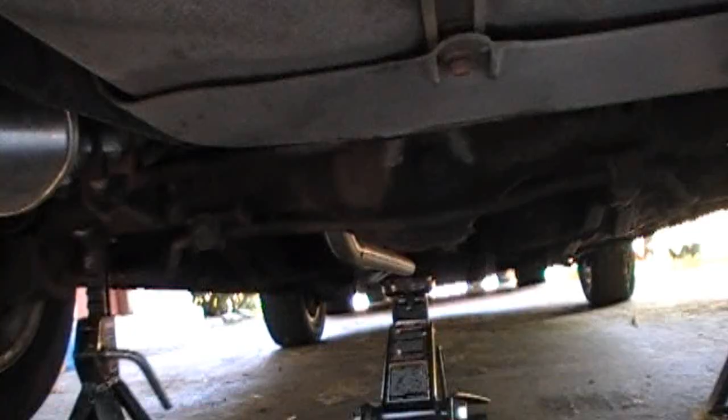As you can see, the car is already up on jack stands in the back, because it's time for a new maintenance group. I've done the engine, I've done the transmission. All that's left is the rear differential, drain and refill, and how to properly take care of one.

This is what makes the Corolla so much fun to drive, because it's one of the last few that is front engine, rear wheel drive.

So let's begin. As you can see, I got the jack stands on where they should be. I jacked the car up in the center of the differential. So next is to loosen the fill plug, take the fill plug out, and then do the drain plug, which is right there. So let's begin.

Since the same oil that goes in the transmission can go in the rear diff, the oil that's going to come out of here is going to stink really bad. Thankfully there's not a lot in there, so it won't take long. I'm replacing it with our friend...

Max Gear. I did not use Max Gear Oil in the transmission because I had a bad synchro, and putting the Synchromesh in there was a really good idea. Synchro Max fixed the third gear synchro problem, and now I can shift in all gears a lot better—well, downshift. It was hard to downshift in third gear. Anyway, this is all you need.

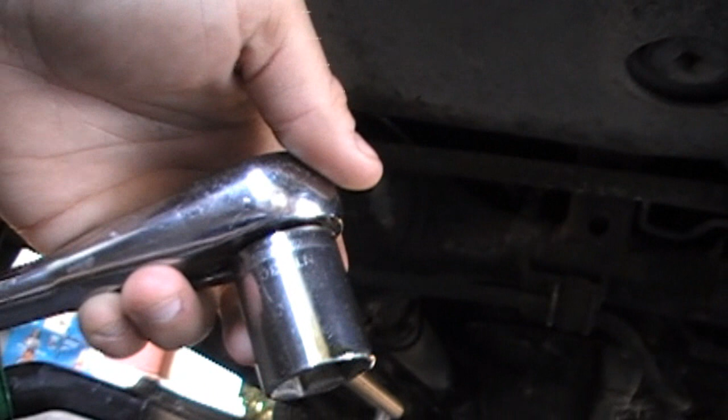So let's start this. Removing the fill plug. Ugh, it's black.

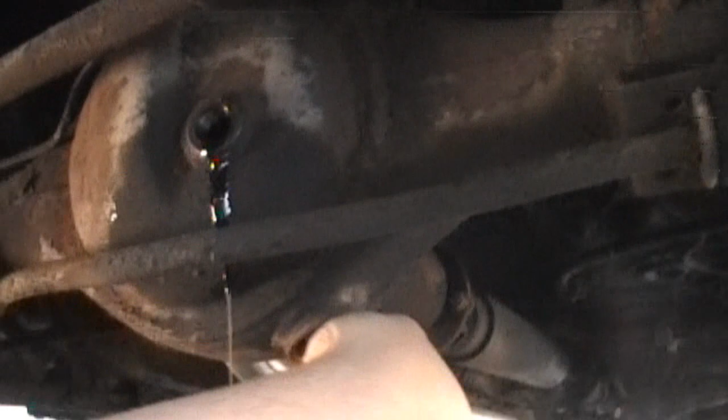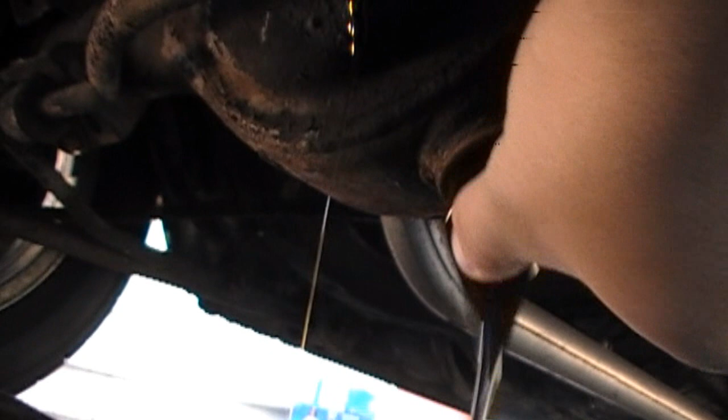Now it's time to remove the drain plug. Now, I don't know if you can see it. There it goes. Ugh, stinks! Let that drain. Okay, I put the drain plug back in.

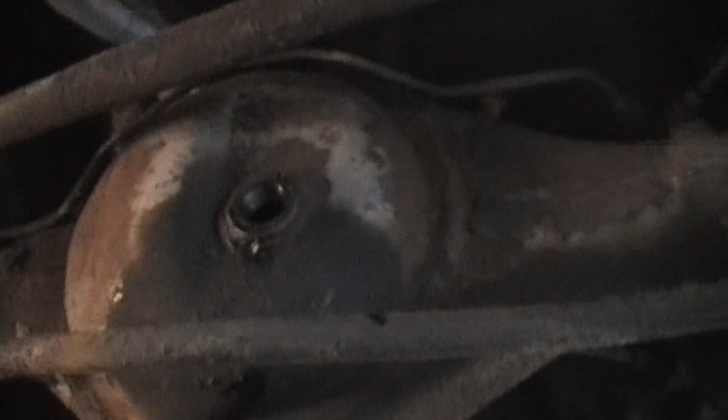Now I'm gonna fill it up. And this is how you know when it's full: when it starts coming out of that fill hole. And then you're done, and that's everything. It's a very simple job, really.

Other care to take care of is make sure that rust doesn't happen, since rust can rust through. Make sure there's no heavy dirt on the case, and make sure that the seals are good. You'll be able to know if your rear differential seals are leaking.

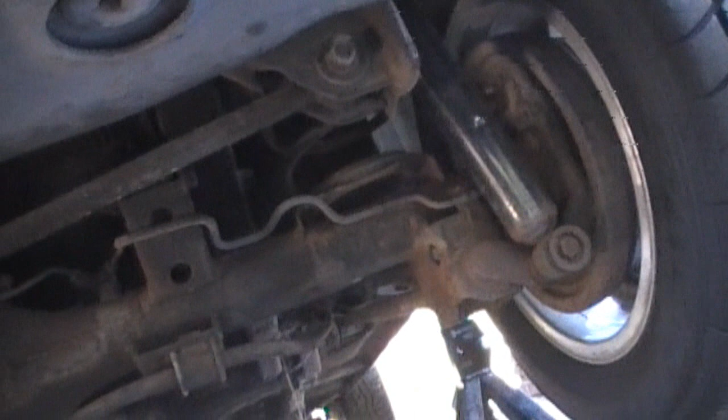Oh, and another little side point: if you've ever wanted to know if your car has a limited slip differential or not, here's how you can do it.

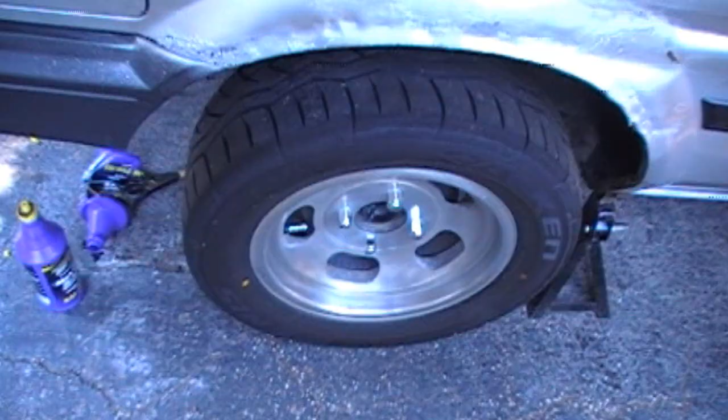This tire is on the ground, the emergency brake is off, and this one is off the ground. What you can do is turn the wheel. If it turns freely, it's an open differential. If it fights you, you have a limited slip of some kind inside. That's a good little tip. Yeah, this is an open diff.

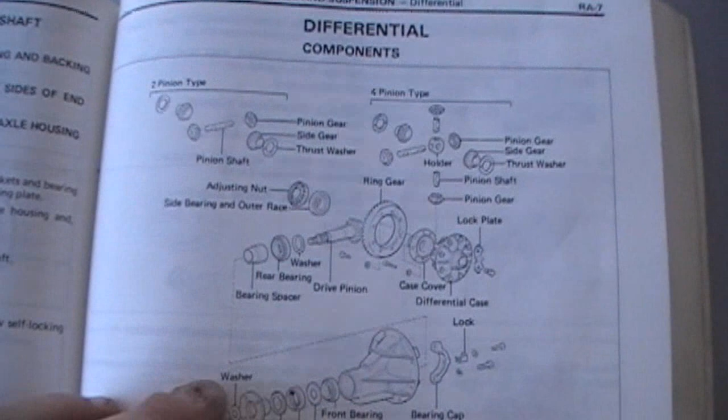But it also has a little secret, too. Now, before I was talking about there being two different types of differentials for this car. Well, it's not exactly true. The size is the same, but mine, in my car, has a special difference.

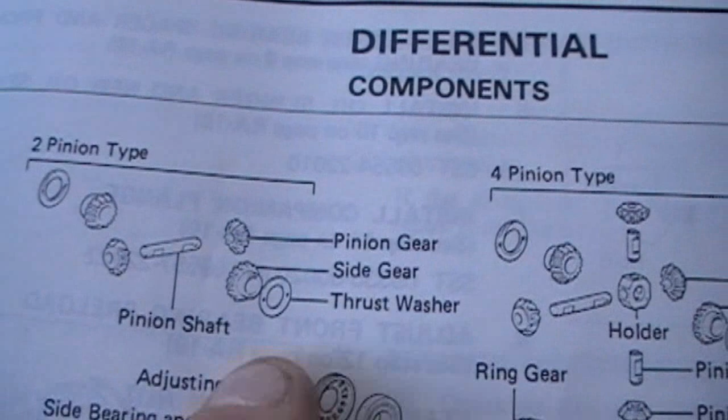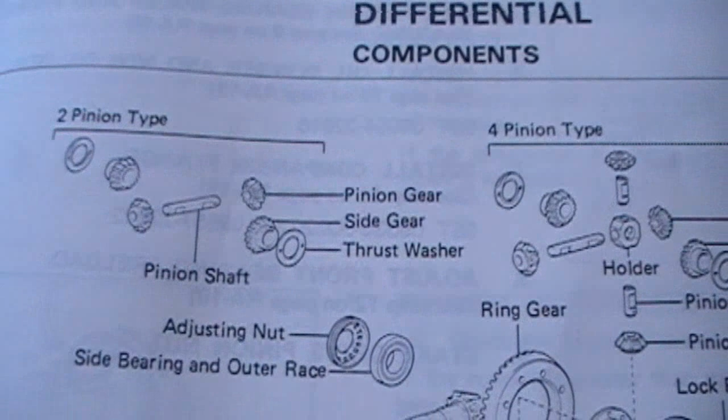You have 2-pinion type and 4-pinion type. The 2-pinion type is your usual—it's got 2 spider gears, also known as pinion gears, and 2 side gears. That's what's in a majority of cars, and those are the ones that usually get the limited slip differential, like in the GTS with the bigger rear diff. Mine has the 4-pinion type. It has 4 spider gears, also known as pinion gears, and 2 side gears.

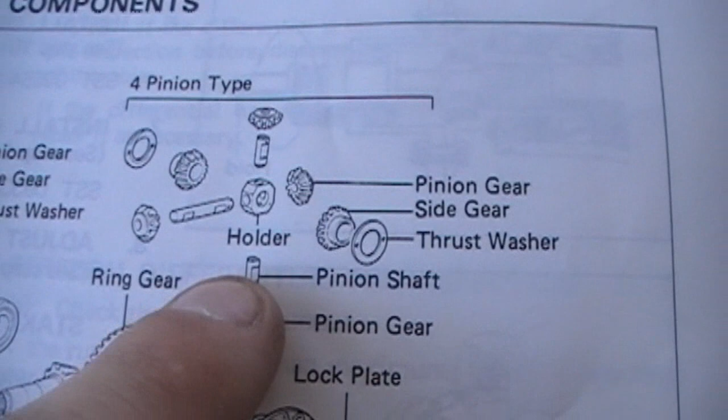And then people think, well, so what? Technically, in my opinion, that should make my differential stronger because there's more gears. The SR5 rear diff, in my opinion, is not weak.

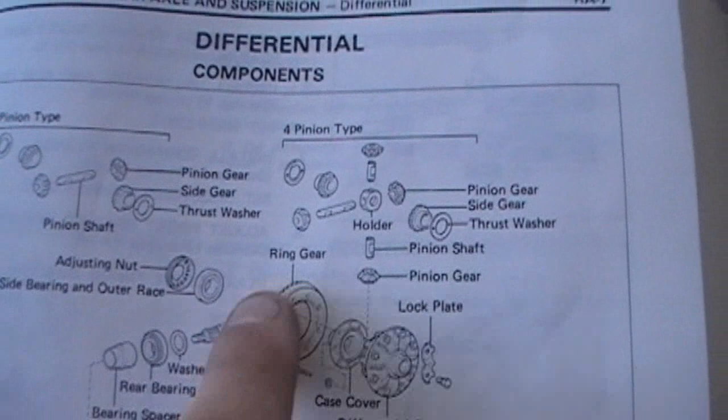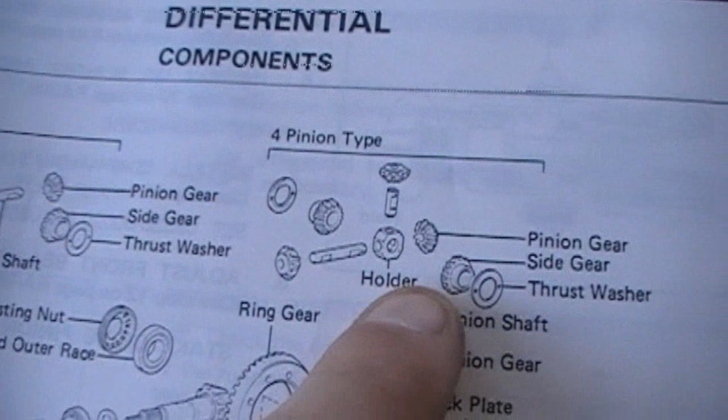I went on to a few sites and I have discovered that many professional race car drivers and race cars prefer the 4-pinion type with limited slip differential over the 2-pinion. It would be cool if I could find somebody to make a limited slip differential for this 4-pinion type.

And that's how you change the rear differential fluid, and how you take care of your rear diff. There's a lot more to come.